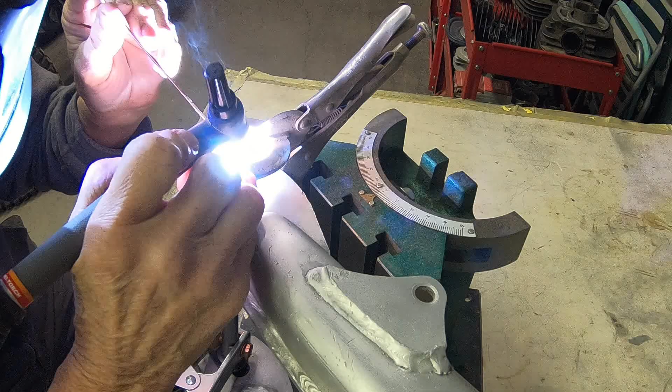Hey, today we're back on the RM in a box, and I've just finished making the rear axle. I've already shown one when I made the rear axle for the Yamaha that we're putting the Suzuki suspension on. So you can go back and look at that one, but we've got plenty yet to do.

I need to make all the spacers, washers. I need to make the swing arm bolt and all the spacers there. So there's plenty yet to do. Probably not going to get it all done in one video. There's just a lot to do, a lot to see. A lot of stuff I want to show you, and I just thought, well, I'll go ahead and knock this one axle out because it is kind of time consuming, and you'll see it on the swing arm bolt too, and you can go back and watch the one on the Yamaha if you're interested.

But anyhow, there's just a lot of stuff that I don't have, I can't find. If I find it, it's worthless. If I find it and it's new, it's too expensive. So we're making do. We've got a lathe, we've got a mill, so we're gonna make our own stuff, save some money. Actually, we're saving money, but originally I had to spend money for that equipment, but it's paid me back over and over and over the years, and it'll continue to do so. So let me get you over here to the bench, and I'll show you what we've got yet to make, and we'll get started on some of it.

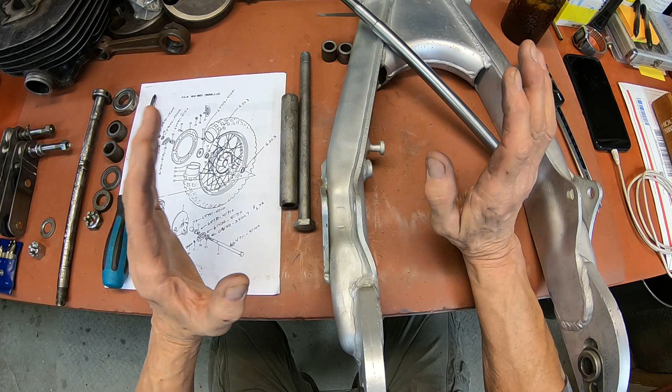Okay guys, here's the axle I just made, and it's got this step down here. Now, the last time I made the axle for the 250, I had some people saying, well, you said it was 16 millimeter, or you said it was 17 millimeter, or whatever. And the important thing is I made the axle and it fit and it worked. Sometimes I missay some, I'm trying to keep my metric and my imperial separate. Most of the time it's straight in my mind, but it doesn't come out all the time that way. And this one guy says, well, man, they don't make bearings in that size. I don't care. It's the end result that matters, and the end result was that I get the axle right.

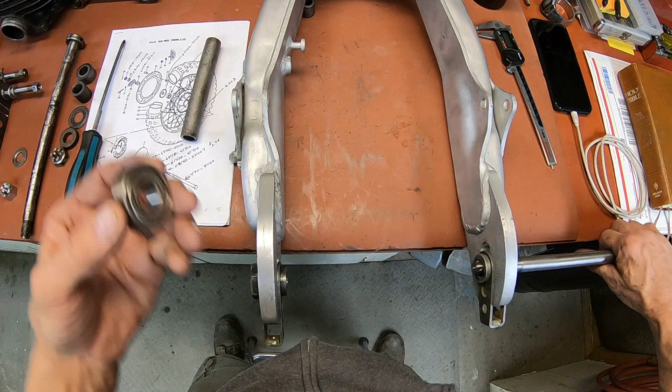Goes in here just like this, and we've got our nut that goes on, and this Suzuki uses these 6203 bearings, and they fit snugly.

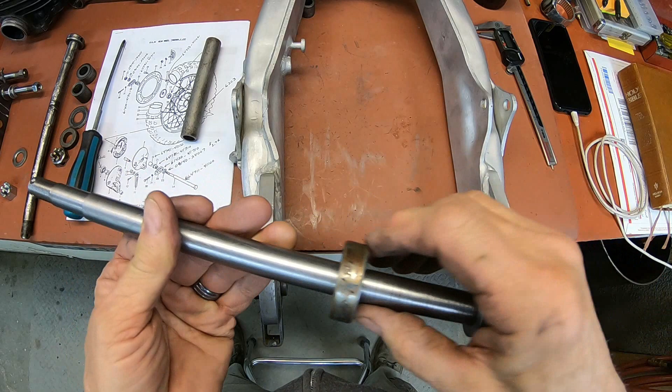So just because it doesn't always come out right, I'd say don't try to build something based on my figures. Do your own homework, make sure you've got the right measurements and so on. If you need a size of like the axle or something like that, then ask me, I'll measure it, I'll give you the exact one. But it's things like that, it just kind of takes the fun out of everything. All right, enough said about that.

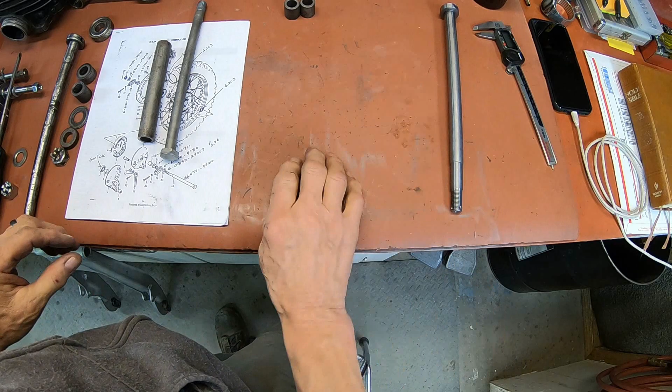Okay, I took this out of the book online there, and I'm missing, well, not all this stuff, but I'm missing all the spacers. Here is an axle that I got for a RM250. That's what it was advertised as, and I'm sure that it is. It's probably not for a C2. So that was my problem. You can tell the difference here. This one here only had the 6203 bearing size, which is 17 millimeter.

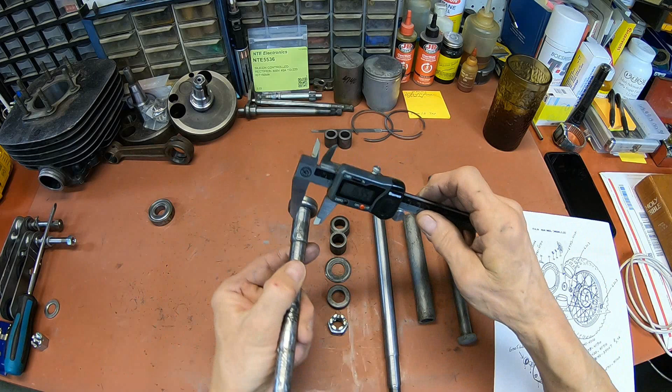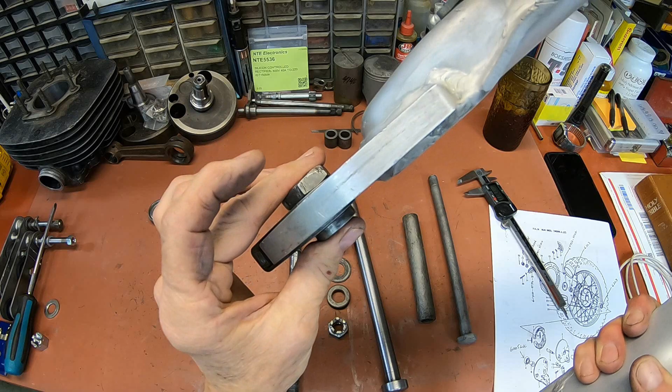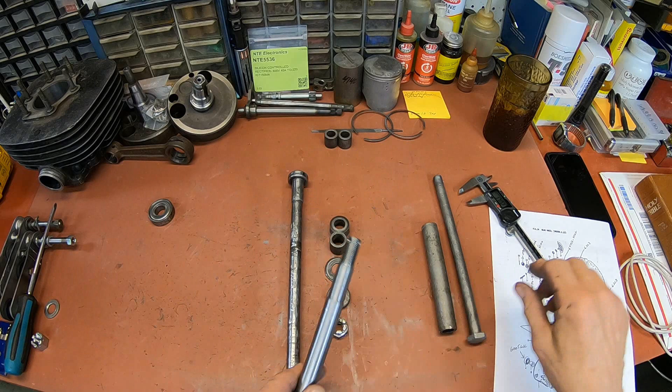It only had it right there, and this one needs it all the way across, except where it goes through the last, this right here. This is actually smaller on this one, and even where it goes through with the flats right here, the size of the hole that's in the swing arm is smaller than the other side. So I had to trim down this to fit the other bushing there in the swing arm, which is essentially 15 millimeter. Okay, but that's the difference, and it was a little bit shorter too, and I needed just a little more length there to get a castellated nut on.

Now, another thing that some people brought up during the last one was the fact that I didn't harden the axle. Okay, here's a Suzuki axle. This is for an RM. It's been beat up, but you can take a file and you can file it. So it's not hardened. Here's a swing arm for the same Suzuki. Take your file, it goes right into it. Not hardened. Here's the spacer that goes in on the swing arm. Not hardened. Now these two pieces here that go out here that actually the bearings ride in, a little different story. I can mark it, but I can't file it.

It's hard. These have been actually hardened because they're the inside race of the bearing. And I had somebody point that out to me too, and that's okay, I get that. They were on the Yamaha. I made a full-size bushing, made all the way across like that, and I didn't harden it.

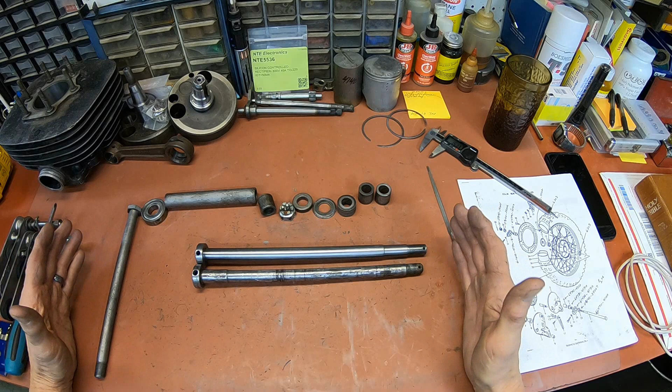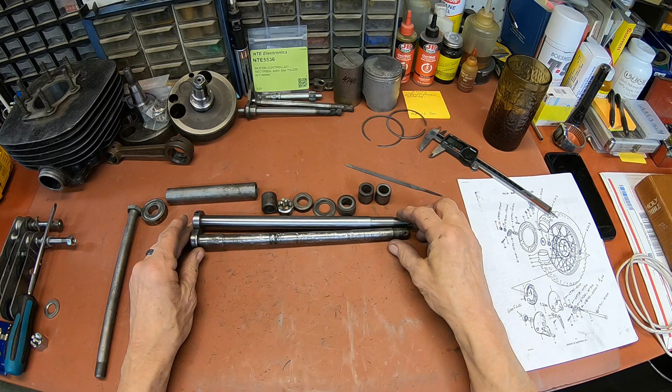I use 1045, which is high carbon regular steel. But it has more carbon content than 1018, which is your normal cold roll or hot roll or whatever. If I wanted to harden it, I could do so because it has the high carbon content. But as you can see, Suzuki didn't harden theirs, so I'm not going to harden mine. It's just a step that I don't need to do. I'll go through it on this just to show it.

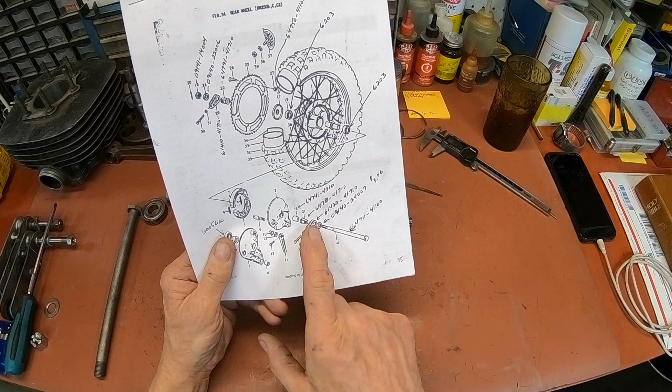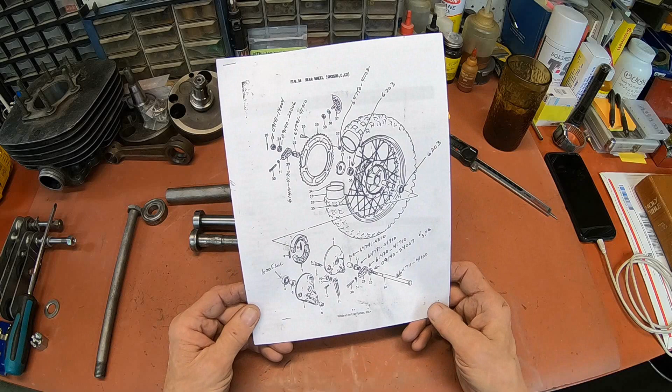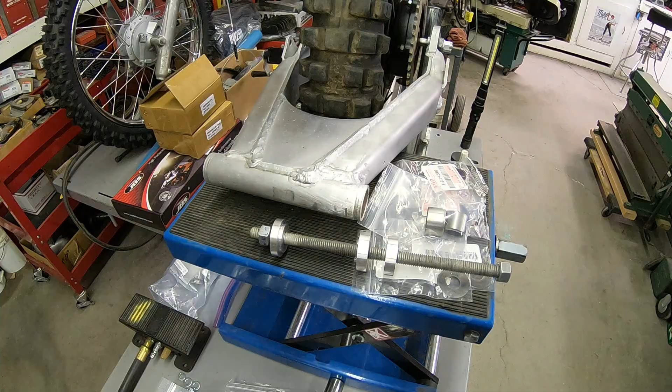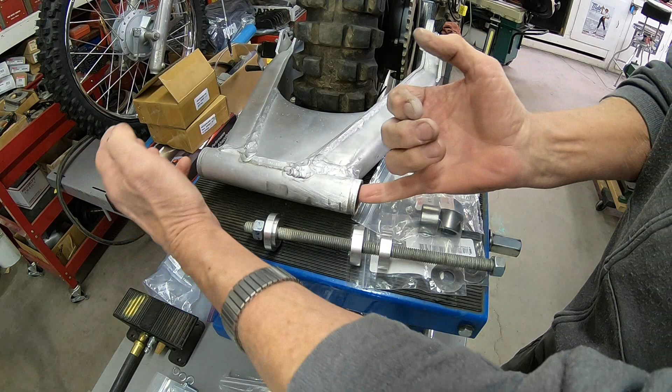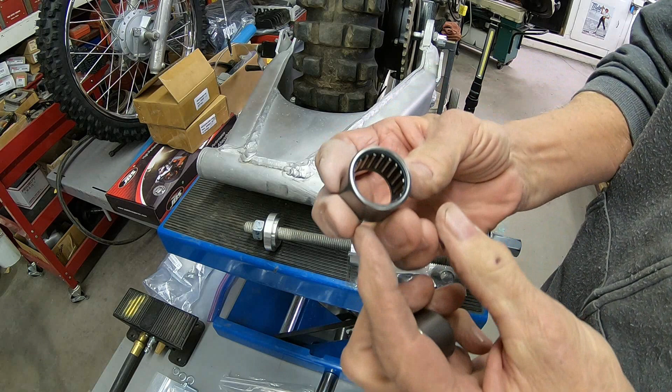Okay, before we get started on that, let's go ahead and assemble the swing arm. I just cleaned the inside of these with acetone. Everything's nice and clean. I'm going to go ahead and put the bearings in, and then we'll work on getting things lined up for the spacers. These bearings, you've got your numbers out here on the outside and nothing in here. So you want the bearings with the numbers towards the outside. And you can drive these in.

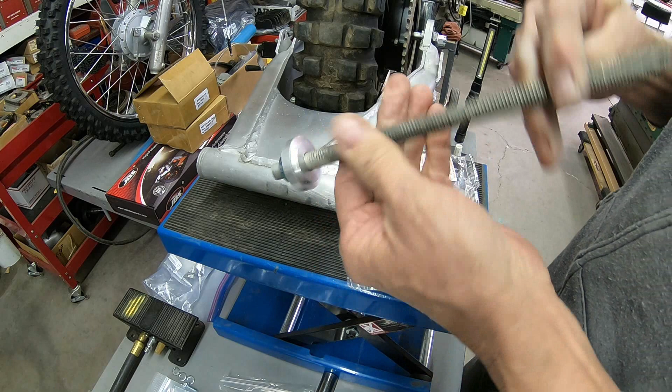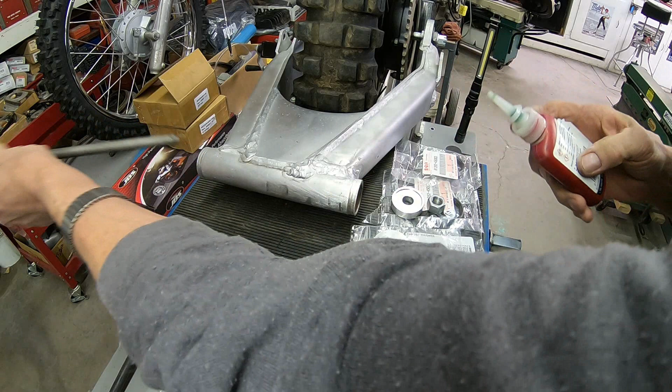I've got a little puller here that I've made, and this side I've got a little lip on it there so that it will center on this side, and over here I want to put a little bit of Loctite. Actually, I'm going to put that in right here before I run them in. Normally you have to heat these up to get them out anyway. That's the best way to do it. So I'm not worried about a little Loctite.

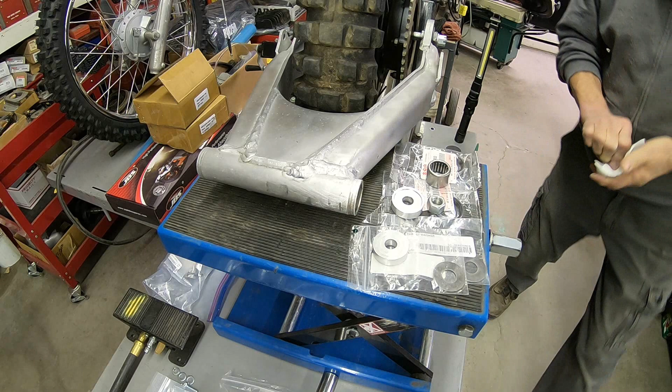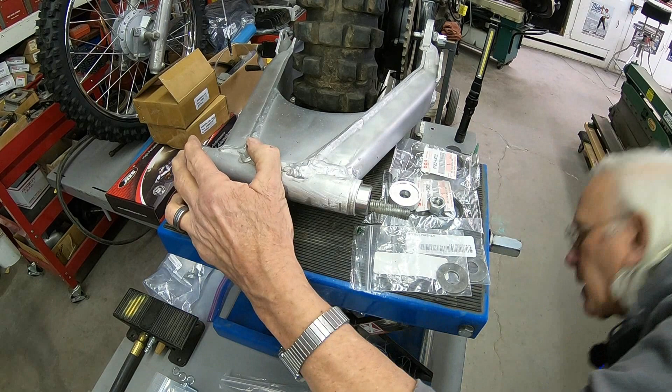Actually, in this case we probably need it the other way. I'll just use this one here so that it goes flat. Some of them are a little different than others. And we'll get our nut on there. You can drive these in easy enough. This is just a little more control. Just makes it go in easier. You can do it in a press or you can do it with a hammer.

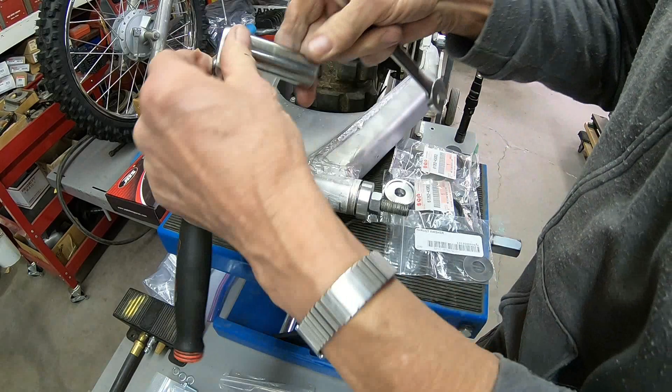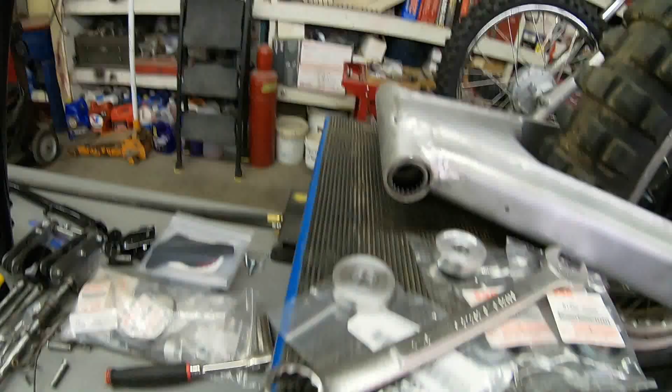I'm gonna get my back up on the other side just to get that last little push. All right, there, that one's in. And they're just flush with the end on these. Okay, so let me get around the other side and get that one done. And then just repeat.

These always, especially since they've been in there for 50 years, the old ones really come out hard. It's a must that you use heat with them. Okay, that's it. Simple enough. All I did on this, I made my pucks on the lathe, but it's easy enough just to get some all thread from the hardware store and use a couple big thick washers. Do the same thing. All right.

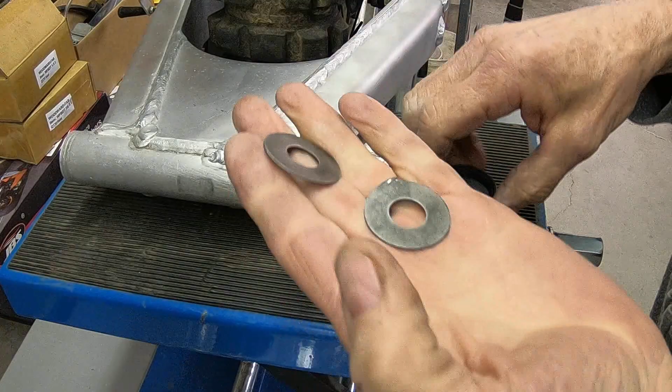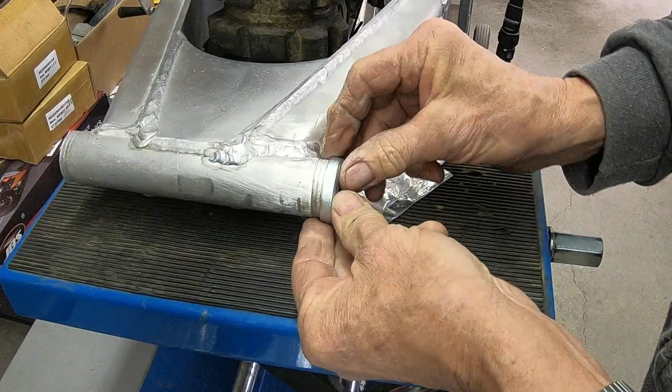Now I was able to get the new seals and thrust washers from Suzuki. They still have them. You'll need to apply some grease in here, both on the seal lip and in here, and then on both sides of the washer that fits in there, and then this goes over the edge here. So I'm not going to put them on yet because I've still got to work out here. I'm not ready to put this together yet, so they would probably fall off anyway. So I'm just going to put them back in the sack here and keep those clean for now.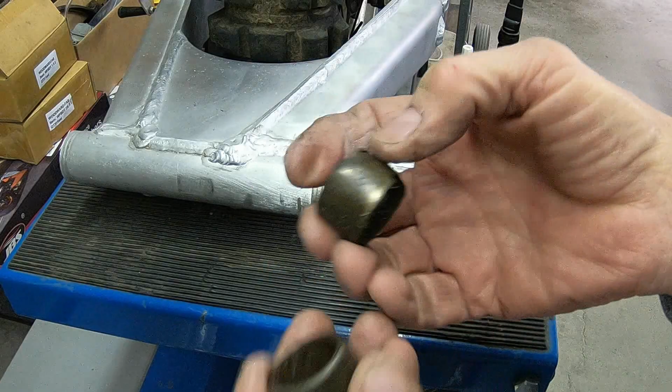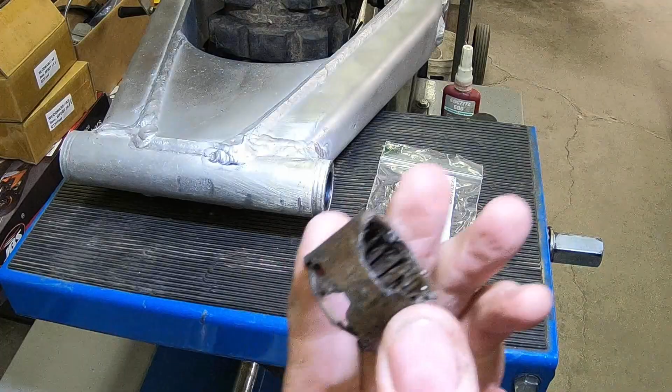Yeah, the old ones, that's the worst one. And it took heat to get these out. There was a lot of water, a lot of rust. You can see the rust in there. And this one had come pretty much apart. But they actually come out pretty easy if you use heat. If you heat this area up really good here, and then just drive them out from the other side. And there's our install.

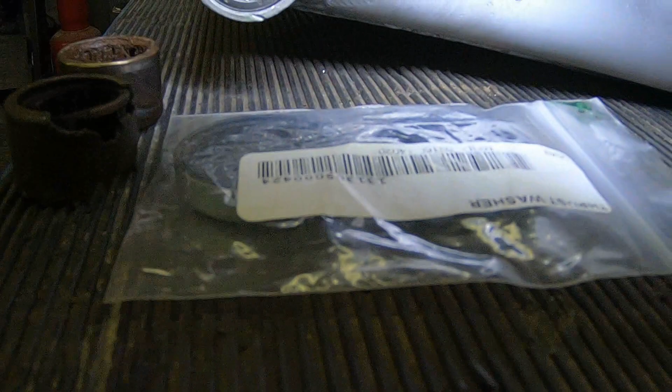You can get longer bushings if you can find them, or not bushings, but the bearings. These are 20 millimeter wide. Some are available in 30, I believe. But these are the ones that came in it. These are what they had in from the factory. So that's what I'm putting back in.

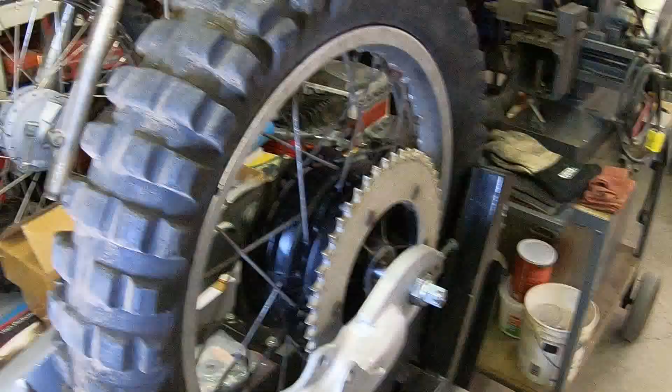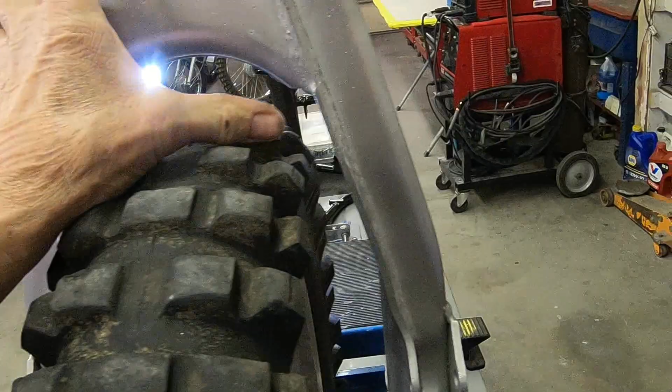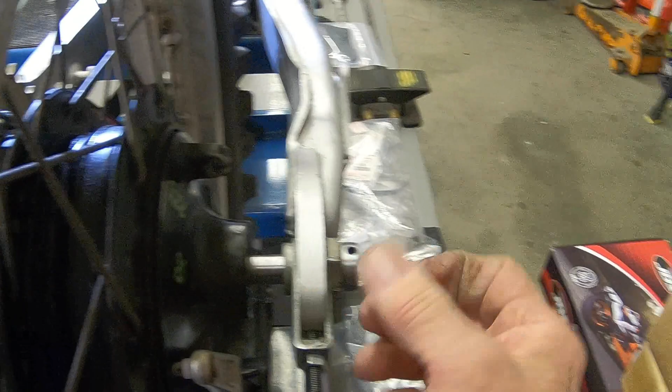Okay, the next thing we need to do is try to get this as centered as we can. It's just kind of a by sight thing. You just want it the same on both sides here. And when doing that, we've got to make this spacer that's right here and this one that's right here. I don't really know what those look like, but in essence, all we've got to do is fill up the space. And we'll make them to fit, in this case, inside this.

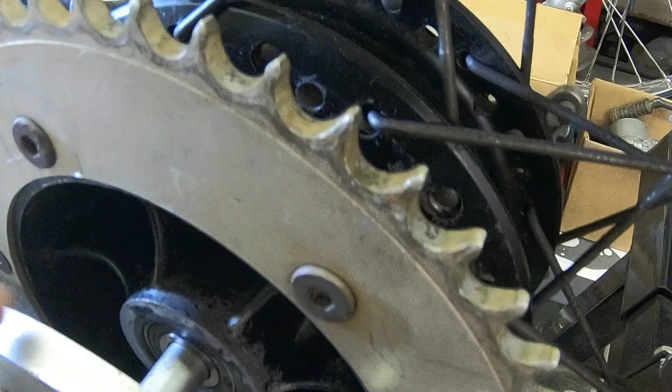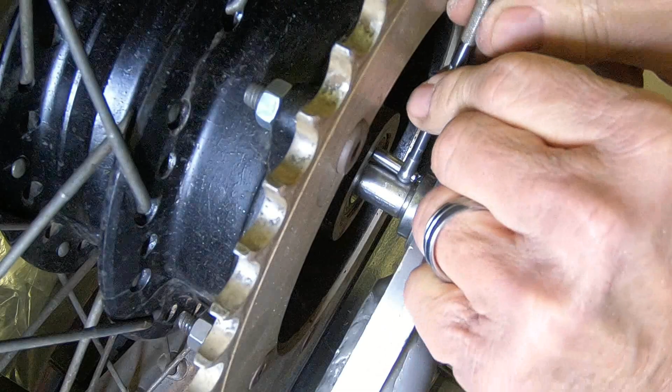And on this side here, I think they had probably a flange out here that would probably cover up where this bearing is. And then of course we just need to come from the bearing over. So let me show you how I'm going to measure that. Okay, it's kind of hard to get in there and get a measurement, so I'm just going to use a snap gauge. I'm going to go in here and get this on this spacer right here, and then up against the bearing race on the other side, and we lock that down, and that's our measurement.

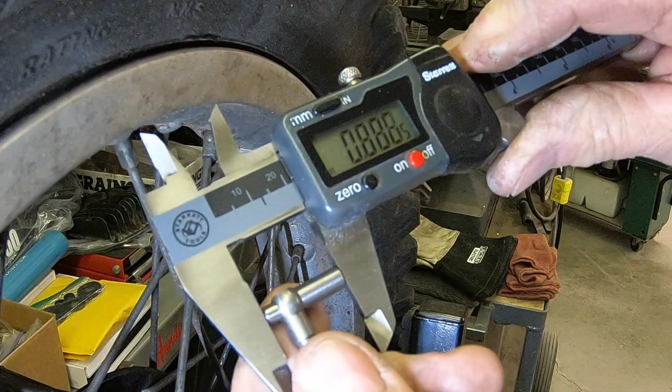So I can go ahead and measure that, and I've got 0.888. So that's our length on this side. Let me get a pen here and make a note of that. 0.888. All right. Now let's go around the other side.

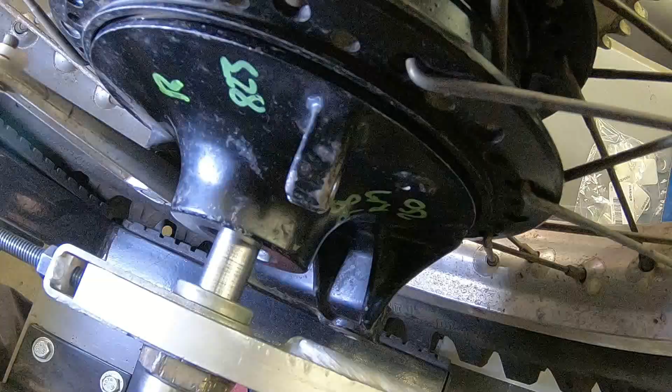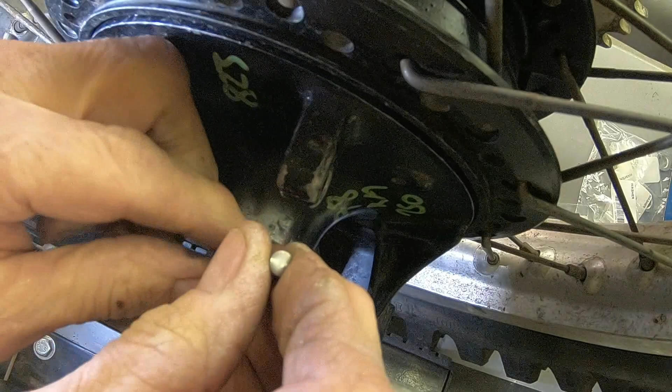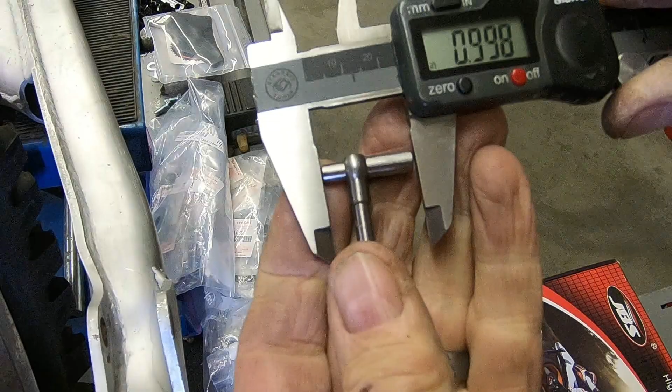Okay, without moving anything, we're going to try to get back in there up against the bearing, and then release it and try to keep it straight, square with it, and tighten it up. I think I moved a little bit. Okay, so that's what we've done. And let's see what we've got on this one. Looks like about 0.998. Yeah, 0.998.

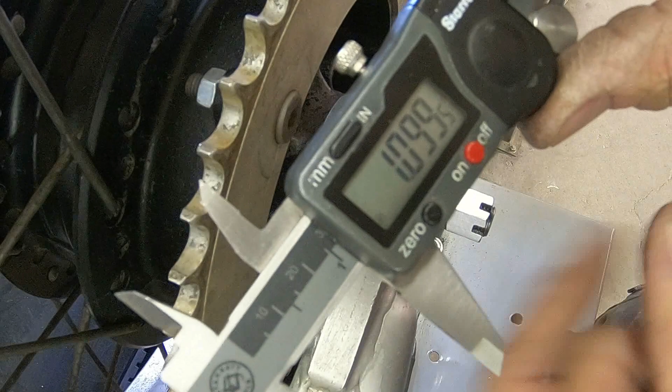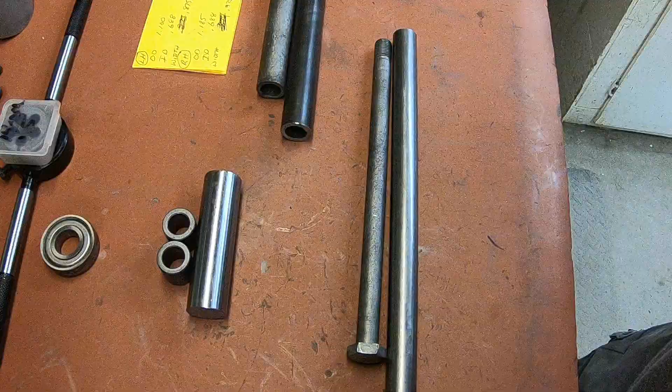I'll probably just make these a couple thousandths over because they'll be long enough that I can trim them to make sure that they fit right. You don't want a bunch of squeeze where you're going to be squeezing the arms together. So you want them pretty close to what you measure. So I'll probably make them 2 or 3 thousandths longer, and they're long enough I can put them back in the lathe and trim them down a bit if I need to. Okay, I've kind of got my materials set out here.

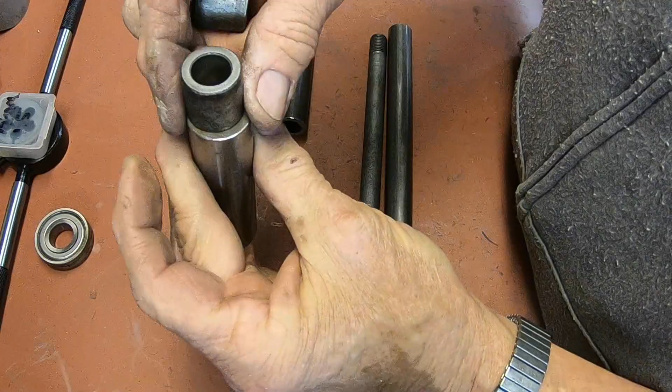I probably would be better off with some 7/8 stuff, but all I've got is inch. This is tool steel O1. So this is what we'll be making these out of so we can harden them. And you've got to have a little extra to hold it and to crank it with the dog on one side. So those will be made from that.

I've got this interior spacer. We could just use this, but I'll probably keep these pieces around in case I've got another one to make somewhere down the road. This is pretty close. We just need to take a little bit off the outside. You probably don't even need to do that, but we'll try to make it the same diameter. And that will do that piece for us.

And here's our axle, 1045. I think what we'll do is we'll thread it like this on both ends, so I don't have to use a big piece of this to make the hex. This way we'll just put a nut on both sides. I think that'll work just fine, and it'll save me a lot of work as far as starting with a piece of material this size and cutting the majority down and away. So I think I'll do it that way. Just put a nut on both ends, thread at both ends.

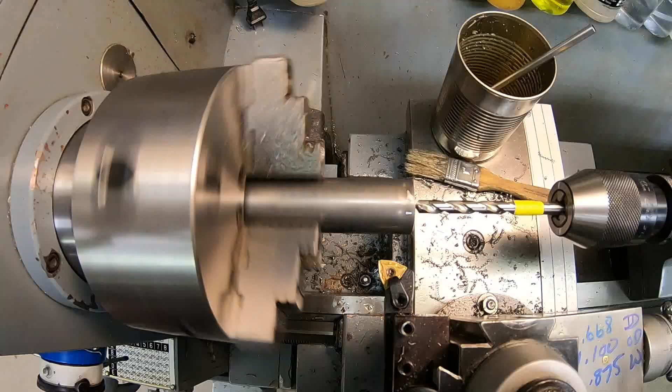We'll go ahead and drill our center hole. We've gone up to 0.668. Now I've actually got a drill bit that'll just about get her perfect, and that's 43/64. So that's what we'll be using. That puts us about 2 thousandths over, which would be good for our clearance for the axle going through. So I'll just start. We're gonna come up to that in increments. So we'll start with this one here.

And we need about 2 inches for both those spacers. So up to the tape line there should get us both pieces that we need. There's a slight difference in outside diameter, but of course the inside diameter is the same. And it's just the length that's really the big deal.

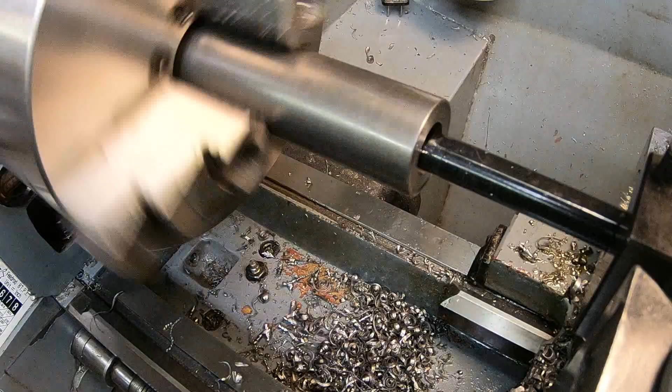Okay, I'm boring out the last little bit. Actually I told you wrong on the drill bit. I had to go to a 21/32, which was 12 thousandths short of our target of 0.668. So I'm using the boring bar now to take out that 12 thousandths. Actually, we're going to take out 14 because I want to have a couple thousandths of play in there, so the axle will slide through easy enough. This should give us 0.670.

All right, start on the outside here now. We'll be going to 1.185 for the one side. Of course, we'll just go all the way for the first time here. I'm going to take 54 thousandths off the diameter here in order to get the larger of the two, and once we get that one cut, then we'll work on the smaller one.

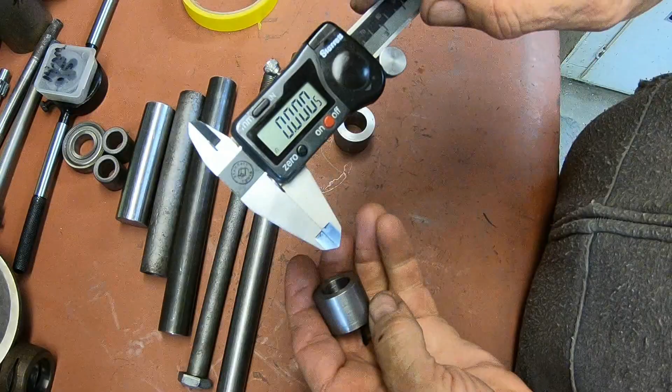Okay, this one here was supposed to be 0.975, and we're a half thou over according to Mr. Starrett. This one was supposed to be 875, and we're a thou under, 874. So let's go see if it fits.

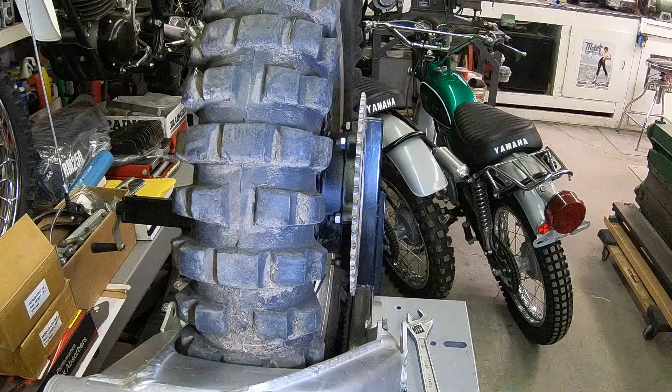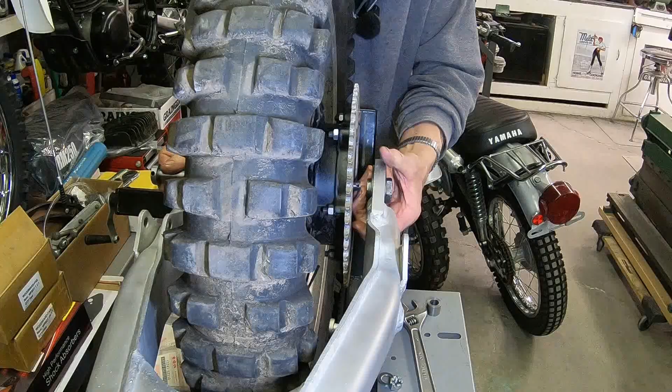Okay, the thicker one was supposed to go over here. The hole in the middle seems to be good. Let's see if we can get this one in. There we go. All right.

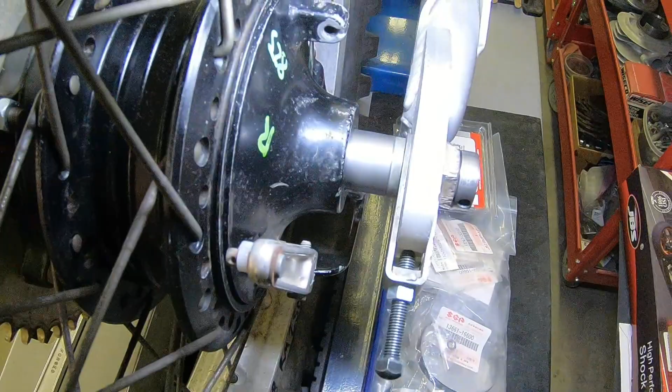And there we go. So let's raise our swing arm up and see what it looks like. Looks pretty darn close to me. I think we're a winner chicken dinner.

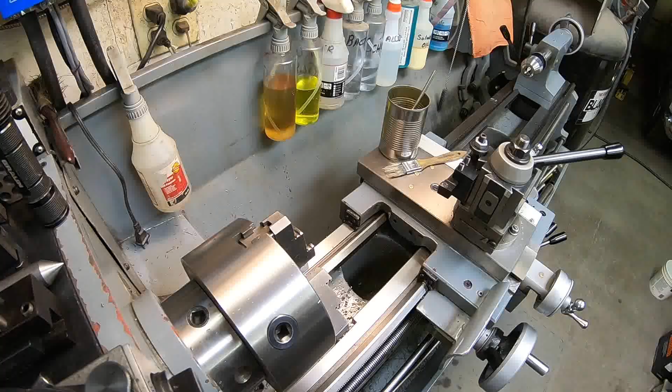All right, let's start on our axle here. We're gonna need almost the whole thing. We just need a little extra down here to run our dog on. First thing I want to do is just trim off the ends, face them, and then we're going to put a dimple in each one.

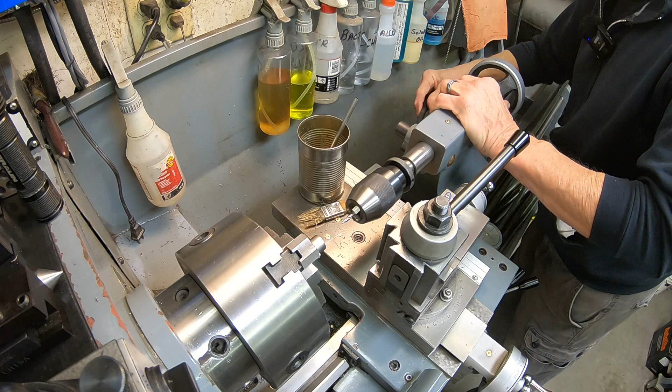And then we'll put our dimple in each end. It's for our center. I know I said axle on this, but it's actually the swing arm bolt. This is kind of the best way I've found to do these long parts like this.

Okay, then what I've been doing is I've got a center that I made myself that I can just put in the 3-jaw chuck, and the 3-jaw chucks aren't really known for their accuracy, but I go ahead and cut it each time myself just to make sure, because every time you place it in here, it's going to be in a different place. This chuck is off about 2 to 3 thousandths most of the time, and this way we can get it dead on.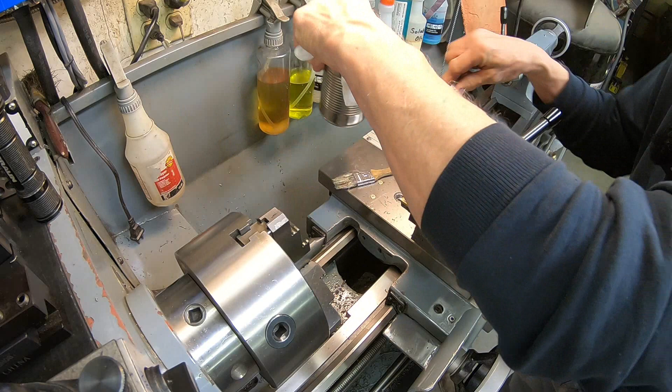So let me get set up here, and we will turn this one. Turn them at about 60 degrees. And really only need to turn down just the very tip of it, enough to get in my centers.

And when these are wore out, you just make another one. It's really good right there. I'm not going to need the whole thing. Just make sure you get it turned all the way around. And then we just go ahead and turn this back around. And I just kind of get this centered up again.

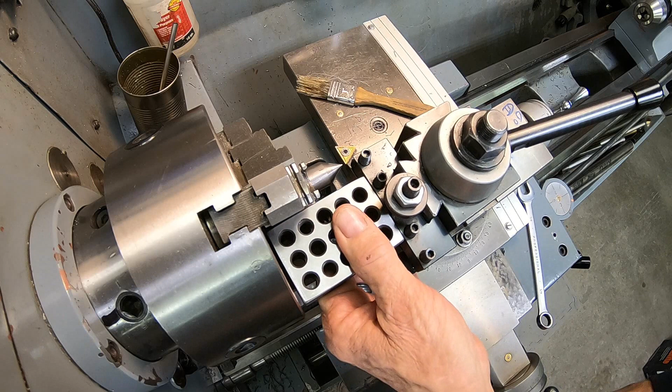Am I going to get there? Yep, I think I am. Kind of see how it's cocked here a little bit, so it's not quite straight. Okay, so that squares it up pretty good. Good enough most of the time. This end's not really going to turn, but I just go ahead and put a little high pressure grease on it anyway.

And then I get my live center and tailstock. And this is my future bolt. And I'm going to put a dog on this end. Hopefully I've got enough there that I can work the whole piece. And that'll go up here and it'll just be driven by the chuck. Yeah, looks like we're good. Okay, I think we're all set up here.

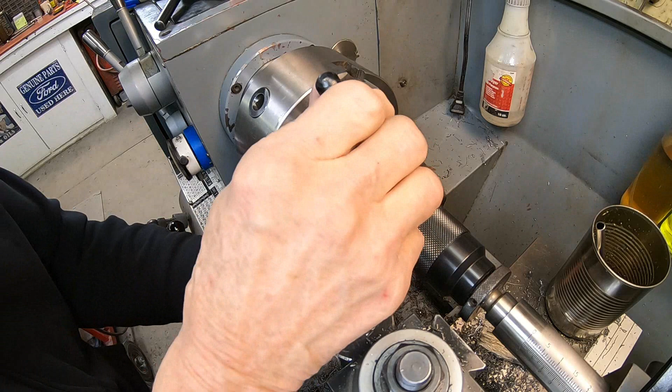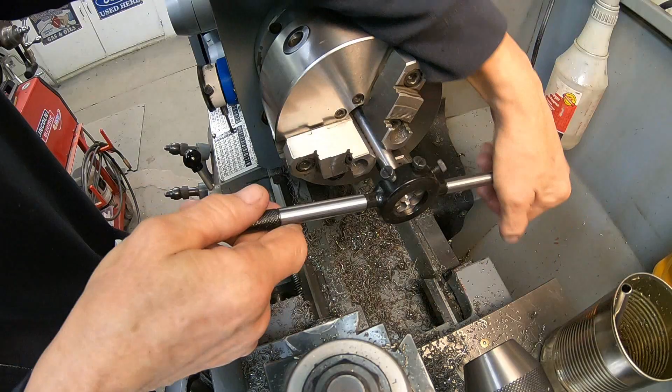Okay, we got this. Now we just trim down the ends a little bit so we can thread them. I'm just going to use a die on this. Just kind of keep a little pressure on that until we get it started. That should be good. Okay, there's one side.

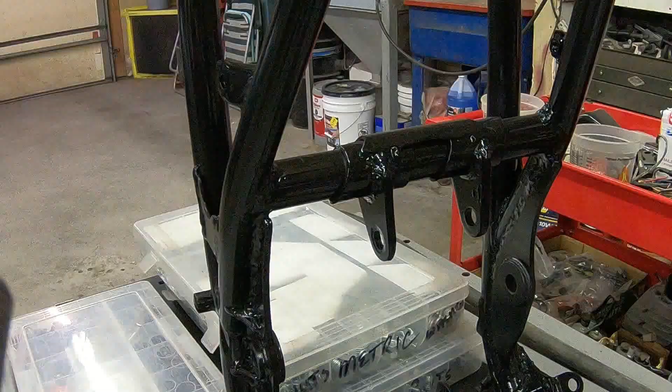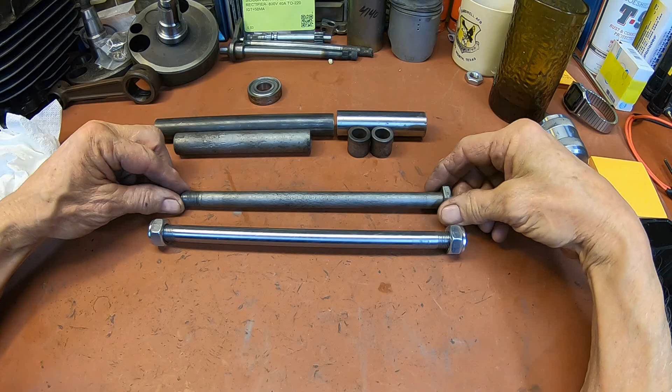Okay, guys. Snug fit. Got nylocks for both sides, and it's a little longer than what I need. If it's too long, I can cut it off. It's snug. All right, guys. There we go. We got our new bolt. I made it a little bit longer. I think it'll be okay. If not, I can cut it off.

And that's about all I've got time for on this one. So the next time that we do a video on this bike, we'll probably do the bushings. This here will be pretty easy. I just got to take a little bit off the outside. Probably don't even have to do that, and just cut it off to the proper length. And these things won't be too big either.

I do have to cut the hole in the middle, and that's just for this. And the same on this one. This one we're using a tube, so we won't have to do that. So the majority of the next video will be heat treating these. We'll go ahead and cut them, and then heat treat the new ones.

Okay guys, there you have it. We've got our new swing arm bolt made, and we've just got to finish up and make the two bushings and the spacer, and we'll be able to go ahead and mount the swing arm on the bike, and we can probably get the forks on and the front wheel on. I think I've got everything for the front wheel, but I may not. So we may be making something there too, I don't know.